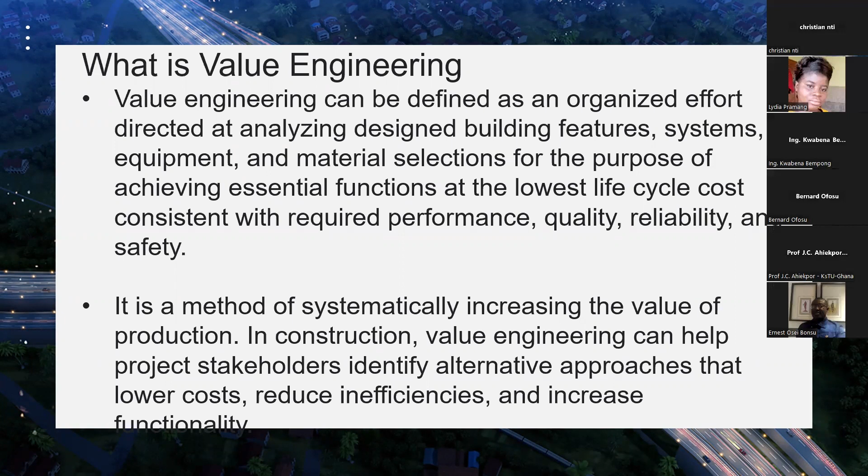So here we are talking about value, and I explained that the goal of value engineering is value improvement. It is not just about reduction in cost, as sometimes we want to believe. The value improvements might relate to scope definition, functional design, constructability, coordination, and all sorts of things. It also means you would want to minimize unnecessary costs, because there are certain costs which are uncalled for. You want to optimize processes, you want to increase profit. All those things are good, but that should not be the sole aim.

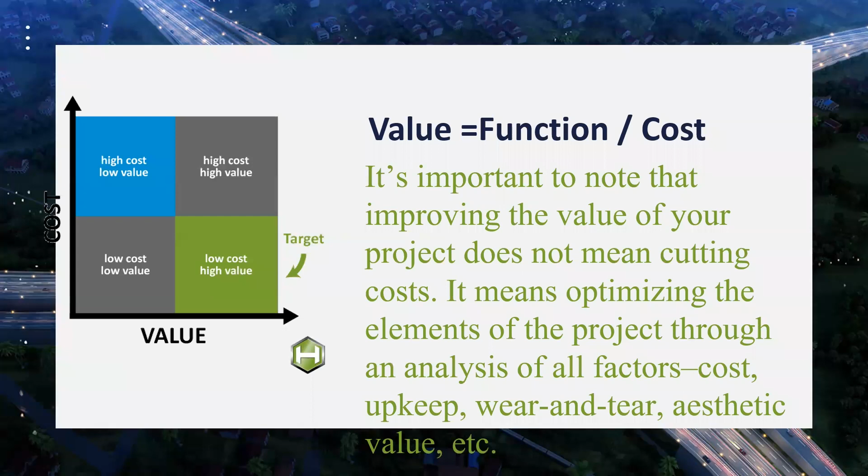At the end of the day, the value is important, and I defined value mathematically as being directly proportional to function and inversely proportional to cost. So value is equal to function over cost. As engineers, you would appreciate the fact that if the function increases and the cost remains the same, the value would increase. In the same vein, if the function stays the same and the cost reduces, the value would increase.

We looked at this particular graph and said you can have low cost low value, high cost high value, but our target is always low cost and high value. That is always our target. We want to reduce the cost, but keep it high in value. And the question one may ask is, what is the reference cost?

So you see, it is therefore an iterative process. You start with something and then you want to refine. You don't tell yourself that this is the solution, because as engineers we provide solutions. That is our main job, to provide solutions, not a solution. There are many solutions, but you need to take it through the iterative process of coming up with the best solution. And the best solution may not solve all the problems, but then it has value.

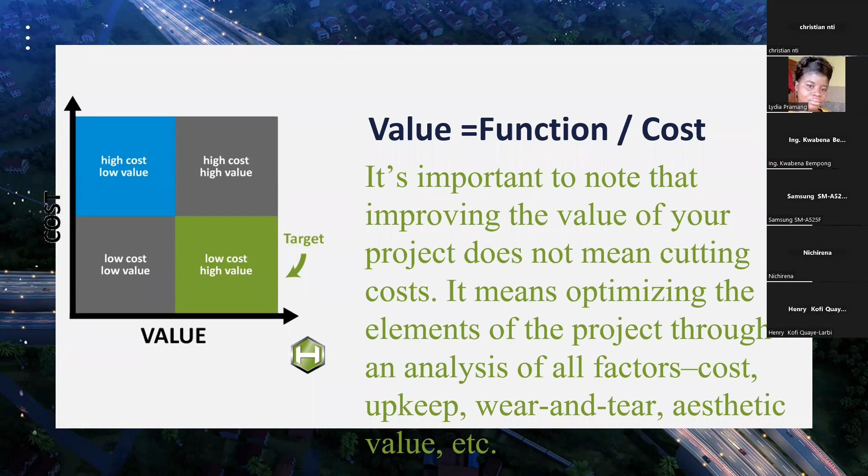And that is what we are talking about. So it is about optimizing the elements of the project through an analysis of all the factors. Cost, by all means, has to be there. The upkeep, maintenance, aesthetic, and everything is all part of it.

Then we went on to look at the approach, and I mentioned that there is no standard approach. All you need to do is discuss with team members, and you have to ask questions. Engineers, you have to be more like skeptics. Don't just see one solution and tell yourself that I have arrived. Ask questions. Ask yourself, what functions are being performed? What is the material specification? What quantity of material should be used? Are there alternatives that have to be used? Are there possibilities of elimination?

Just begin to question. And I used my own case, that a maxim I have is that because things have always remained the same, that is not enough reason we must not change. Change is always necessary, and we must be adaptable to change. Don't be set in your ways. Don't be set in your mind that there's no other way, even for something that you have done over and over again.

Somebody asked me about the difference between value engineering and value analysis, or something like that. And I did mention that the difference between the two is that one may be an established process.

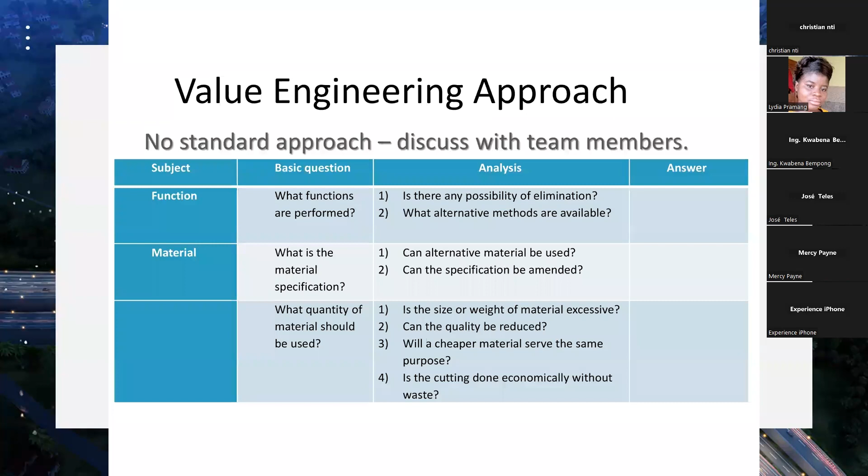One is an established process, but then you can also have a situation where you have a new product or a new design or a new construction that you're undertaking; that is where you do the value engineering approach. For value analysis, it's something that is existing and you want to find ways of improving or increasing the value. Then we went on to look at the methodology, and please let us take note of it.

We start with information gathering. You have to do a functional analysis. You brainstorm, and the whole idea of brainstorming is to come up with alternatives, which is something that we do when we are doing economic analysis. And then you evaluate these alternatives. Having done that, you then move on to that particular alternative and develop it further. And then you make a presentation to your client.

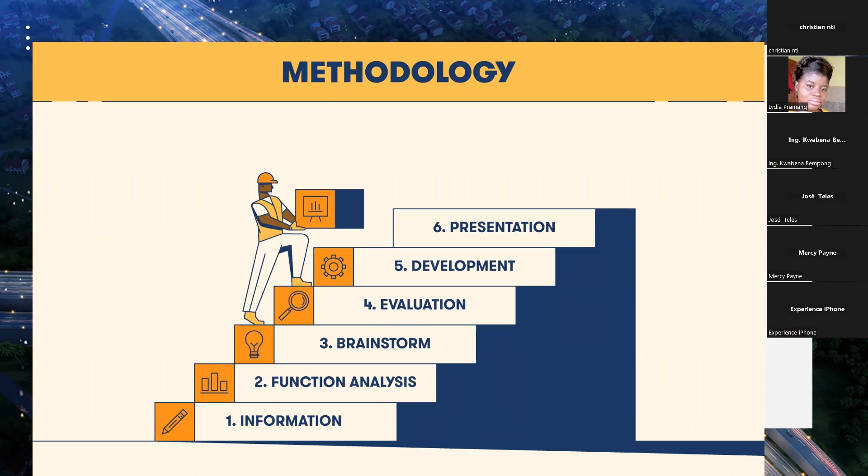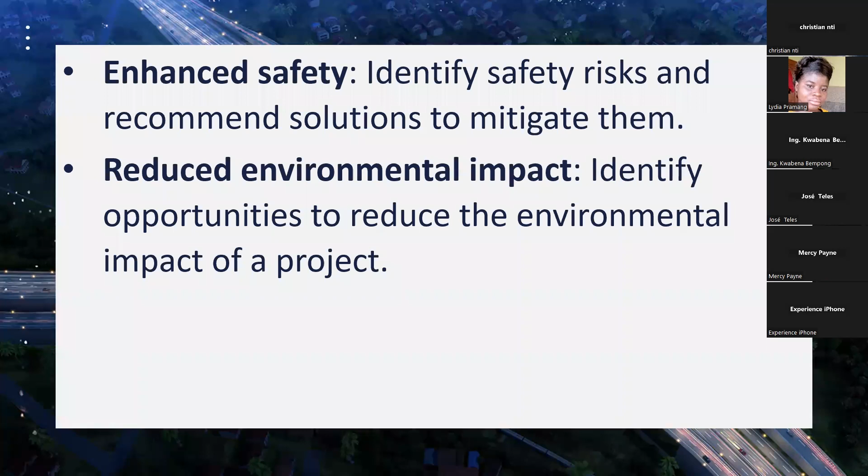So what are some of the benefits? Cost savings, improved efficiency, a better quality of the product that you are providing, enhanced safety and reduced environmental impact. We also looked at this particular graph, and the question that comes is: when do you undertake value engineering? Should it be at the planning stage? Should it be at the operation? And the answer was that it can be at any stage.

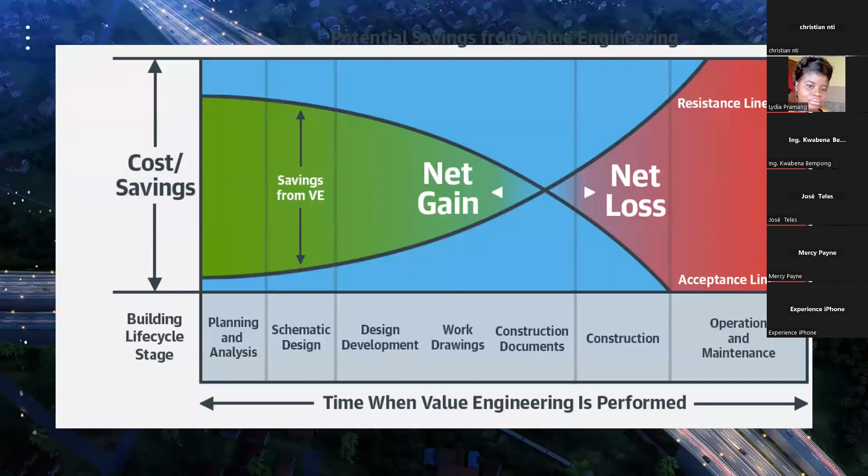Therefore, in the beginning, if you are able to have a good value engineering exercise, you stand a lot to gain, as opposed to waiting till the end. When you have bought everything and then you want to change the method of construction, that would create a problem. So having done that, we are now moving on to the case study of the Pokuase Interchange and local roads project.

Please permit me in the first few slides to talk about some background information. The Ministry of Roads and Highways was the implementing ministry, and the implementing agency was the Department of Urban Roads. This project was financed by the African Development Bank and the government of Ghana. Associated Consultants did the design and supervision; the design entirely on its own, and for the construction we partnered with Bigen Group of South Africa. The contractor was Zhongmei Engineering Group, and they did quite well.

Our scope of works: design review, supervision and contract administration, safeguards, compliance monitoring, documentation and reporting, and then the post-construction. Please permit me at this stage to introduce Associated Consultants to you. Associated Consultants is the leading infrastructure consulting firm in Ghana. We are a multidisciplinary firm and maintain world-class technical expertise. We are a wholly Ghanaian-owned firm, founded in 1968, and we maintain high standards for quality, health, and safety, committed to delivering projects on budget and on schedule to the complete satisfaction of our clients.

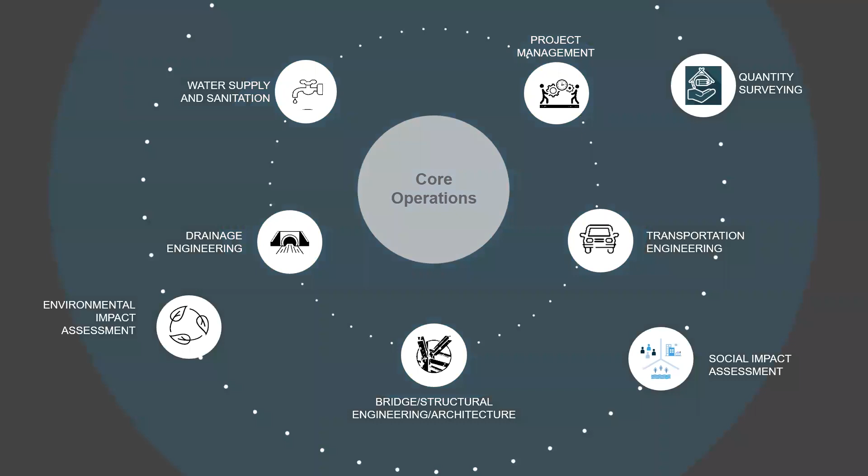I believe that at this stage, Associated Consultants is the only local consulting firm that is ISO 9001:2015 certified. Our core operations are in water supply, project management, quantity surveying, transportation engineering, social impact assessment, bridge and structural engineering, architecture, and environmental impact assessment. And as I mentioned, there's a very fine blend: the older ones, not too old, and the young ones, all blending. This is just a snapshot of those that we have.

So now let us move on to the design and construction of the Pokuase Interchange. To start, I always have this quote, just like what you would say: in the beginning, God created the heavens. The intersection was chaotic, with several accidents coupled with high pedestrian and vehicular traffic. Who fought for space? The pedestrians on many occasions lost the fight. So the government of Ghana looked at this and was unhappy, and therefore approached AfDB for funding of an interchange and approach roads.

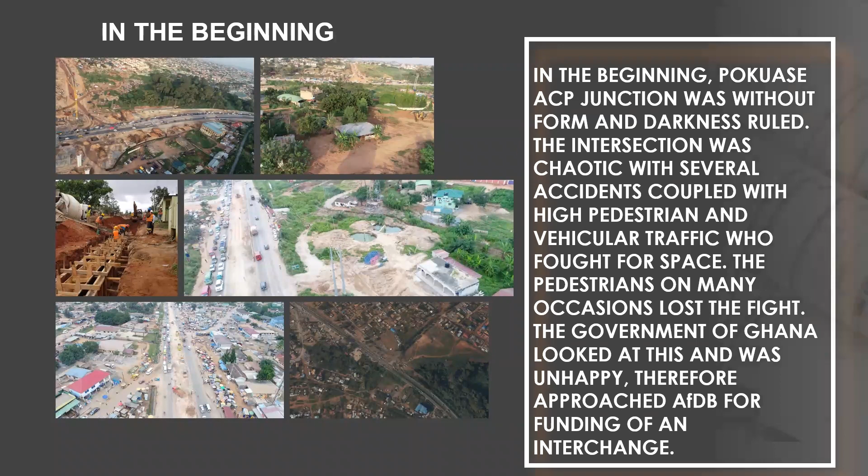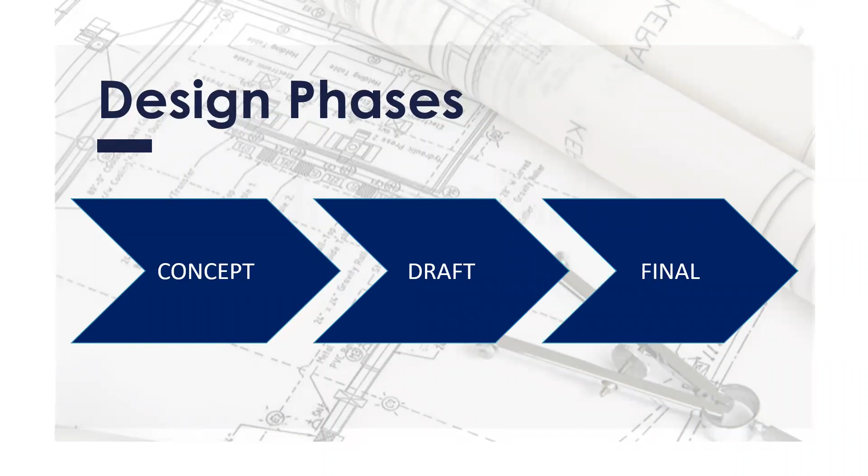So let us first look at design. And at this stage, you see where we applied the value engineering process. Our design phases: conceptual, draft, and the final. But before then, we do not just say that we are going to put up a 3-tier or a 4-tier interchange. It has to be data-driven. It has to be driven by traffic modeling and information. We have to check other factors.

So we came out with 7 alternatives, and this is where the value engineering is. 7 alternatives were considered, and each option was then subjected to factors. Remember what I mentioned, that you then go through the process of looking at the various options and alternatives, and then subjecting them to a rigorous analysis. This is what it is all about. We've done the functional analysis. We have now come to the point where we are looking at the alternatives.

And in our case, the factors that we used were: what is going to be the land take in terms of overall property impact? Are we going to impact so much property that we cannot even pay for? What is the capacity that we are going to derive? When I talk about capacity, we mean the traffic capacity. And then the cost. Is it going to be so expensive that we cannot build? And as I mentioned, value engineering always must have a cost element in it.

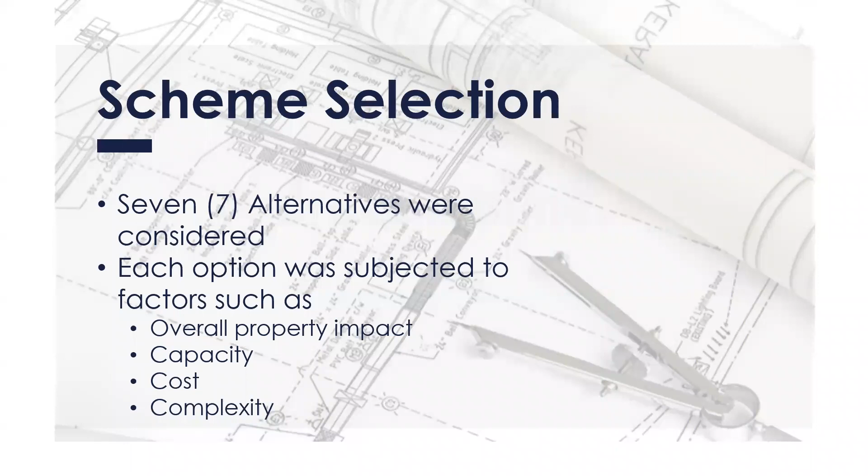Then complexity. Is it going to be so complex that nobody else can build, apart from maybe people from the US or from the UK? No. Our plan was to ensure that it wasn't too complex and it can easily be built by Ghanaians or any international contractor. So the schemes that we explored, the first one was an at-grade signalized intersection.

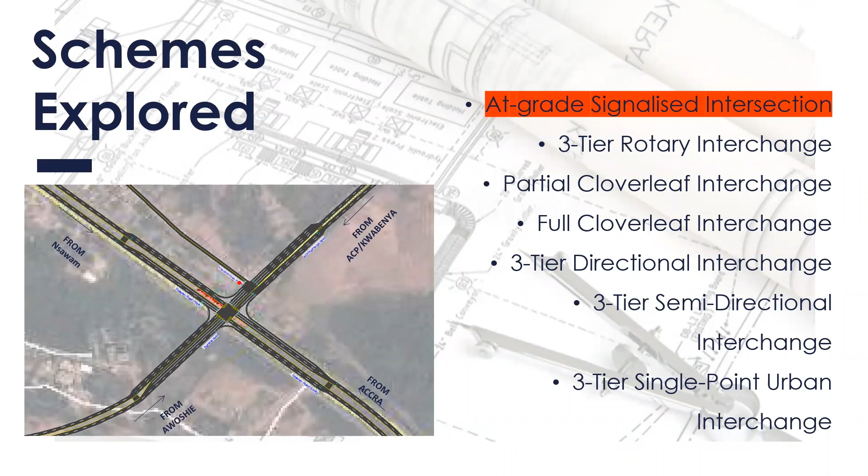And I'm not going to go too much into the detail. So we said, okay, why don't we just have a signalized intersection? So from Awoshie to Kwabenya, and then from Nsawam to Accra, let us just have an intersection there, traffic upgrade. So we looked at that. Then the next one was to look at a 3-tier rotary interchange, like the one you have at Akwaje. Let us explore that. So that is what we had.

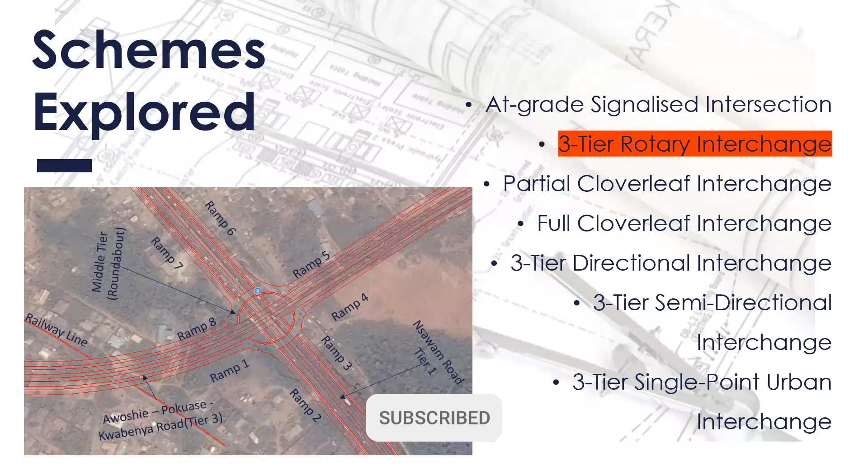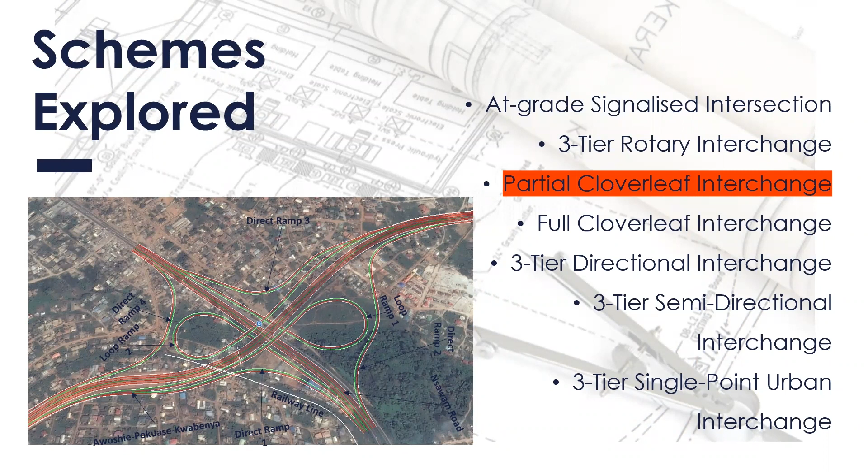Okay, what about going to a partial cloverleaf interchange? Partial, not the full cloverleaf. So a partial cloverleaf like what you have at Apenta. Then the next one was, okay, full cloverleaf. At Tetteh Quarshie, we have a full cloverleaf there. Then let us go into more like a system interchange. So we are looking at a 3-tier directional interchange. Directional, we don't stop.

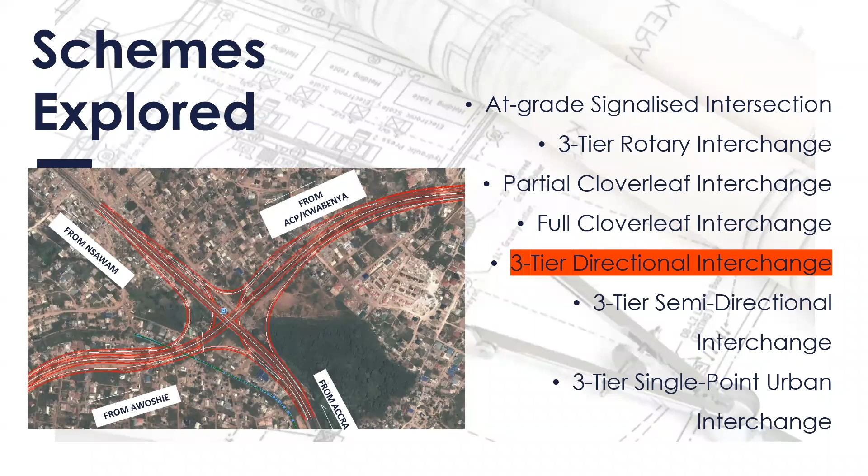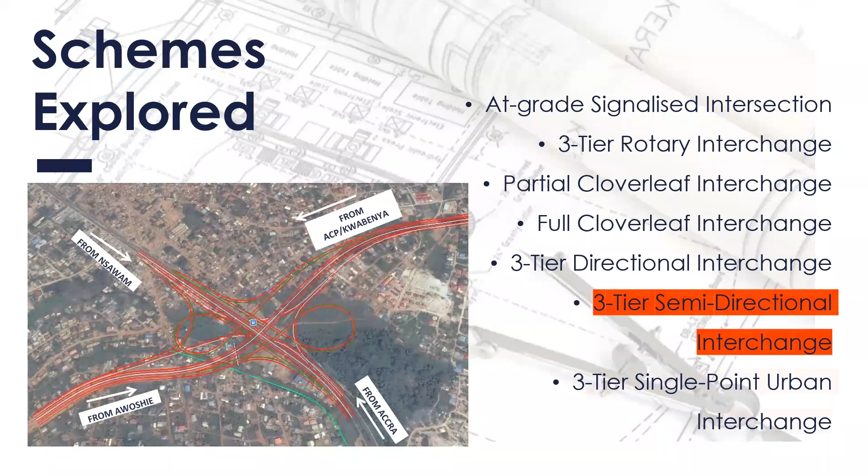Then what about a semi-directional interchange? And these were all, you can see that we have drawings. We just didn't think of them in our mind. We have to draw or sketch them to validate our concepts. So these are all parts of the value engineering process. Then we went into a 3-tier single point urban interchange, what we normally refer to as SPUI.

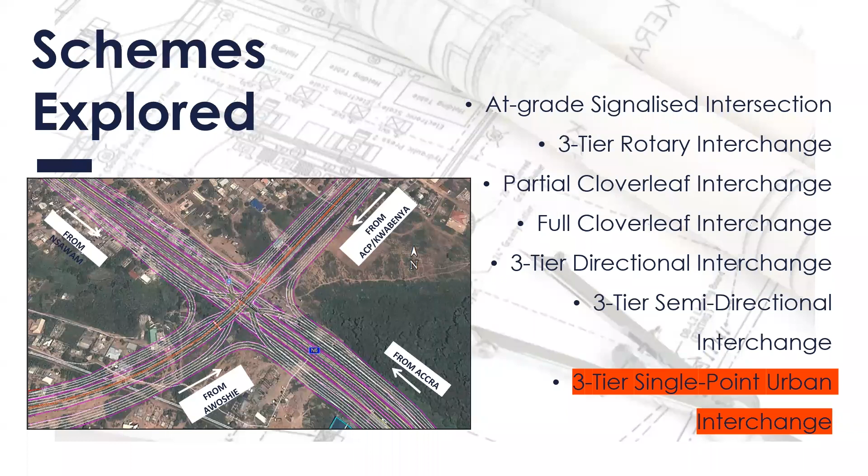So having done the evaluation, now I'm going to the next stage. You remember the approach, you have to do the evaluation. Having done the evaluation, we came up with a selected scheme. At the end, even after you have selected a scheme, you still have to drill down and ask yourself, what are the positives and what are the negatives? What could happen? What could go wrong?

And remember, I did mention that there's something we call fatal flaw analysis. Because in fatal flaw analysis, what you are doing is that you want to identify, discuss, and mitigate the risk for your projects. Every project has risk, but you need to know them. If you don't know them, how would you mitigate? There are issues of technology risk. You can design something nobody else can build, because it becomes building a castle in the air.

So you have to ask yourself, can this be built? And remember, I talked about constructability. Engineers don't design something that nobody else can build. We can only build it in the computer model. But then on the ground, it's a different story. So if you cannot build it, please think about it.

In other jurisdictions, what they do is that the designs are even given to contractors. And then the contractors, we ask them, can you build this? How are you going to do this? So the contractor will come up with a methodology for the construction. Sometimes you don't even have the materials in country to import. How much is it going to cost? These are things that one has to look at.

Then the risk of what you are providing. You are providing something that may be risky. And many other environmental issues. You know, in our case, we had the Gua Co. Co in Ga means forest. So Gua Forest was very, very close by. And if we're going to impact on it, what will be the level of impact? There were a lot of properties there. How were we going to impact on the properties? We had to pay for them. So all these things were looked at.

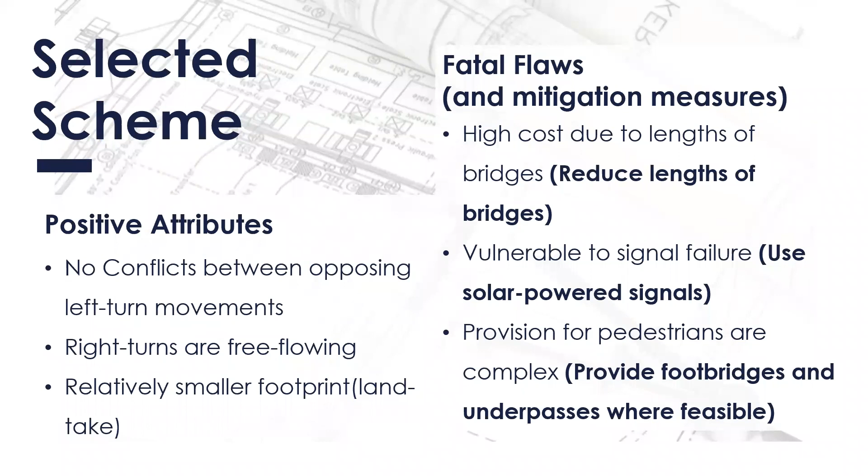Right turns are free flowing and a relatively smaller footprint. Just consider or compare. Look at what I gave you. For instance, the full cloverleaf option. The full cloverleaf may be good, but then the land take is huge. So you can compare what we have there and then what we have at Tetteh Quarshie, you know.

Then the fatal flaw. So we ask ourselves, as I had explained to you, we have to identify and discuss and mitigate the risk for our project. So we realized that you could have high costs due to the length of the bridges, because the cost center of interchanges is the bridges. The bridges cost. So the major cost centers are to do with the bridges.

So what then do we say? Okay, let us reduce the length of the bridges so that we'll have a lot more embankments, so that you reduce the cost. Also, earth is not too expensive in Ghana, so we have to look at that. Maybe in other jurisdictions where they do not have the material, that may not have been their solution to the high cost. They may have looked at other options.

Then we said it is vulnerable to signal failure, because in the middle tier, we were going to have only left turns, just what we call a two-phase signal. Stop, go, not those complex four-phase or three-phase signals. So this was going to be a two-phase signal. Then we said it is vulnerable. What about if the power goes off? So we said, okay, then we'll use a solar-powered signal.

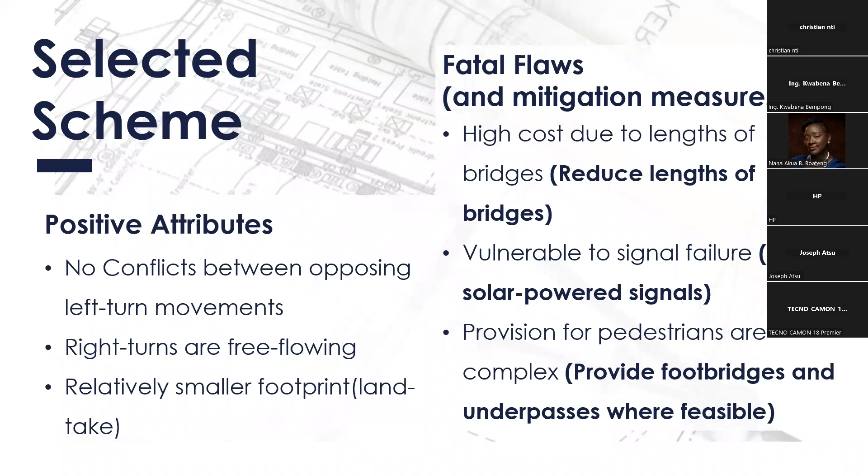Then we had tier 2, which was a signalized intersection for the interchanges, so that if you were coming from Awoshie going to Kumasi, or from Accra going to Awoshie, or from Kwabenya going to Accra, or that kind of arrangement, that is where you were going to turn. And then we also had the free flow right turn, which was not subject to any traffic. And then tier 3 was the Awoshie Kwabenya Road, that is at the very top level.

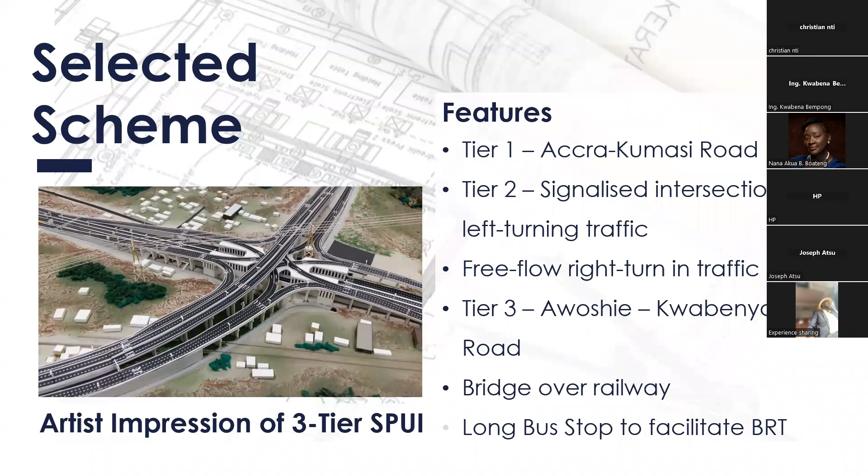And then we also had a bridge over the railway, which is to the western end of the interchange, and a very long bus stop to facilitate the operations of the bus rapid transit, which was piloted some years ago. So these were basically the features of the 3-tier single point urban interchange that we designed and went to town with. And very soon you'll get to know how value engineering led to the 4-tier interchange.

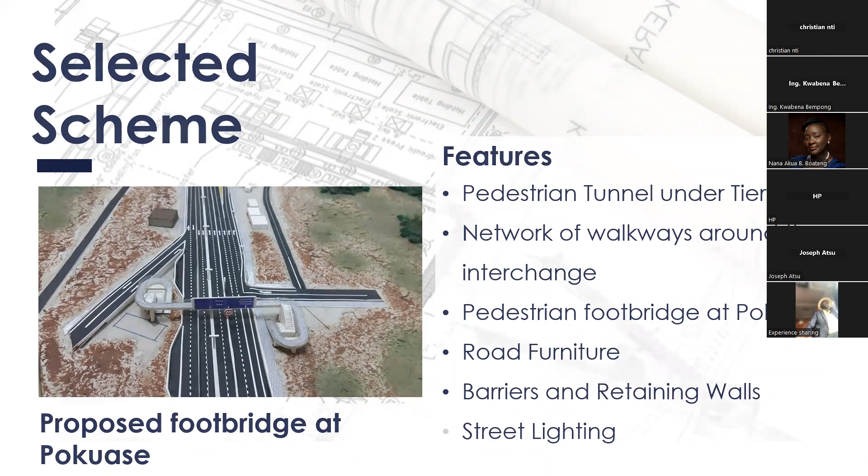And this is even at the design stage. So as you went on to the next level, you see that you can have value engineering at any stage. Even after doing all this, we had to do another one, and I will explain why we did that. As I mentioned, we had footbridges and underpasses, but I'm not going to go too much in that. So now I'm looking at the selected scheme, and again, I'm going too much probably, but just for the benefits, because we have various types of engineers here.

Because even when it came to the bridges, the type of bridges to choose, is it going to be post-tensioned? Is it going to be precast post-tensioned, or pre-tensioned precast, cast in situ? All sorts of combinations. Is it going to be steel? What are you going to do? So these are all part of the processes; you have to undertake a value engineering process, even for the choice of the technology or the choice of material.

So we came up with post-tensioned, pre-stressed concrete, triple cell box girder, and I'll be showing that to you very soon. We had reinforced concrete box girders provided for spans up to 21 meters. So it's not everything that was post-tensioned; where we had shorter spans up to 21 meters, we just did the normal RC, that is reinforced concrete box girder, without any post-tensioning.

Then there are others too, where we had box girders, that's the post-tensioned pre-stressed concrete, for spans up to 48 meters, between 38 and 48 meters. And then there are areas where we have separate box girders and all that. So these were things that were chosen, and all at the time of design, because for bridge design, you should know how you are going to construct it, even before you do the design, because the manner of construction has an impact on your design procedure or design process.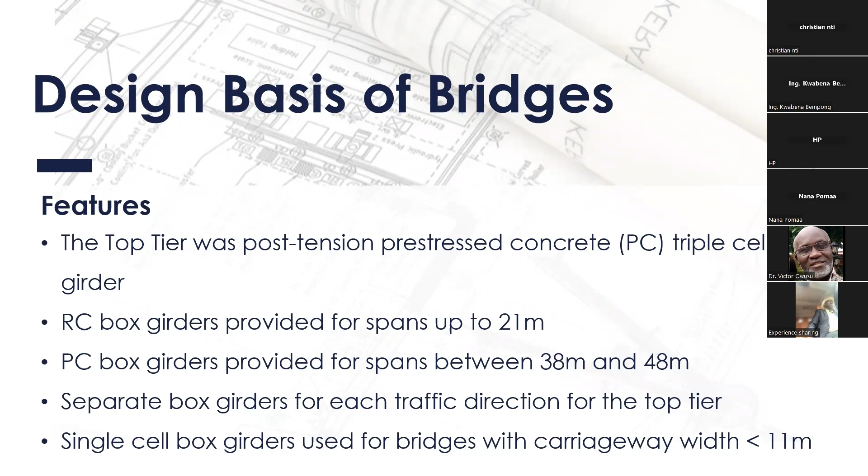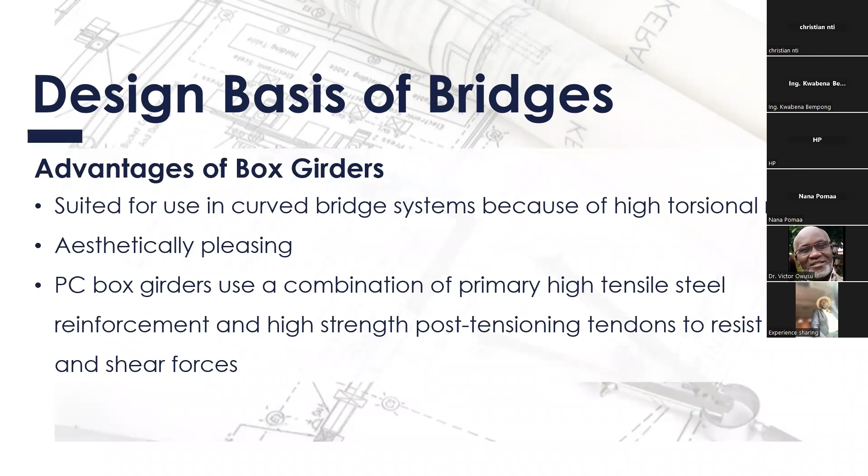Very important. I'm not a bridge engineer, but this is something that I have learned having been on the project for all this while. So again, what are the advantages? Like we always do, you must have advantages and disadvantages. Whatever you do, don't just do it by rote. There must be a reason for doing it. And this is what we came up with.

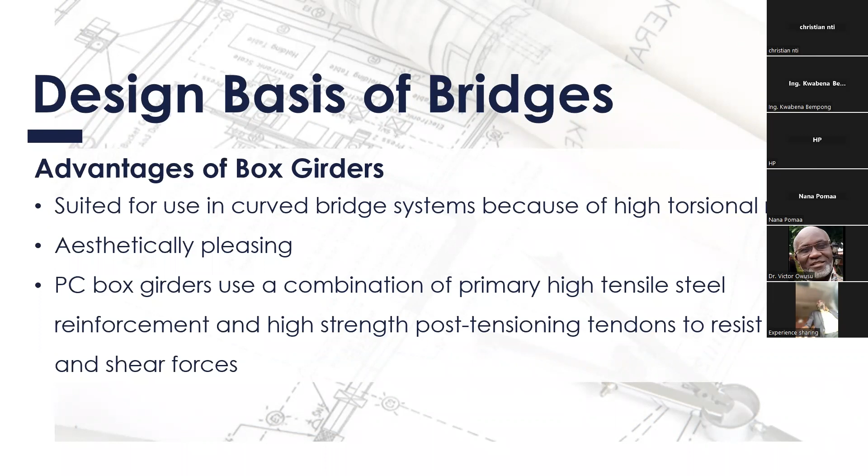We said that it was suited for use in curved bridge systems because of the high torsional rigidity. It is aesthetically pleasing, and they use a combination of primary high tensile steel and reinforcement. And this is something that we already know. And some of the bridge sections. So this is just showing the plan of the various bridges. We have the top tier, the ramps, and then the middle tier, and then retaining walls.

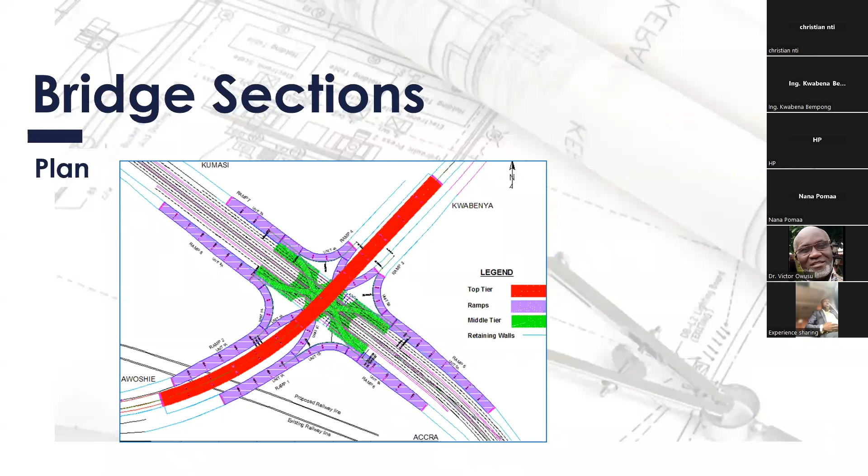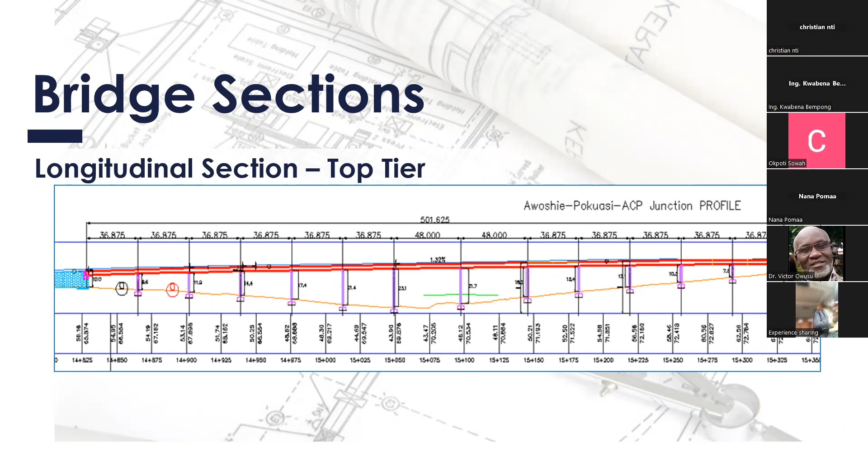So in terms of the sections, we have the longitudinal section, just showing you the spans. So you can see ranging from 38 through 48 all the way. And again, these were all at the design stage. We'll see that once we got into the construction stage, we had to make some changes using value engineering, and that was a value engineering from the contractors. And so the railway bridge, as I mentioned, and the spans are also very clearly shown here. So for instance, this is a single box post-tensioned cross-section.

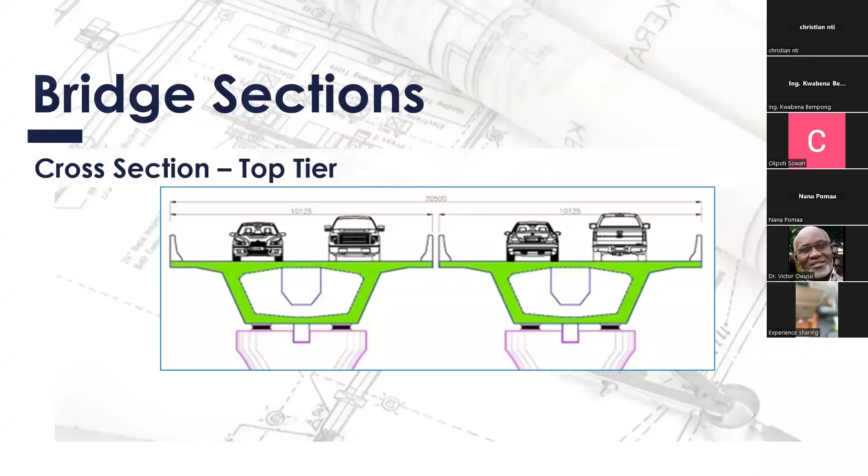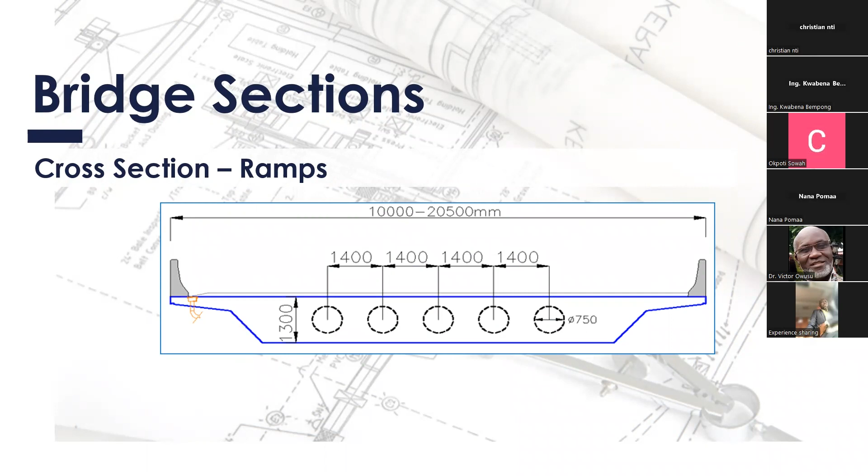Then we also did another interesting thing. For the ramps, we used a voided slab. I think that there's one voided slab on the N1. That is the one that was done by GHA some time ago. Yes, that's another cross-section showing here.

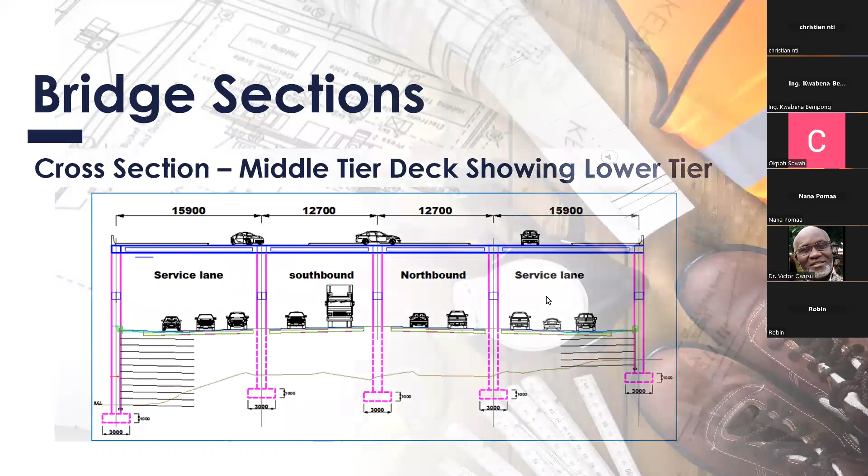So now let us move into construction. So now we have gone to town, we've gotten a contractor, the contractor is on site, we have to undertake a design review. And it is always good for those of you who are contractors that you subject these designs to your own checks and value engineering.

It helps because at the end of the day, when you are able to come out with a good proposal, you earn half of the savings. Yes, half of the savings will be for the contractor. So there's good reason why you must undertake value engineering. So there's some money to be gained.

So in 2018, the contractor came to site. These are just the contractual details which I've already shared with you. The project was awarded in March 2018. So the construction works. So basically what we're doing is that we're going to construct an interchange at Pokuase. We're doing 7 kilometers of storm drains, and this is something that a lot of people do not know.

So after the confirmatory tests were done, the recommendation was that instead of providing a few piles at the pier locations as had been envisaged at the time of design, there was a need for us to provide piles for all. So this is just some of the samples from the drilling that we did.

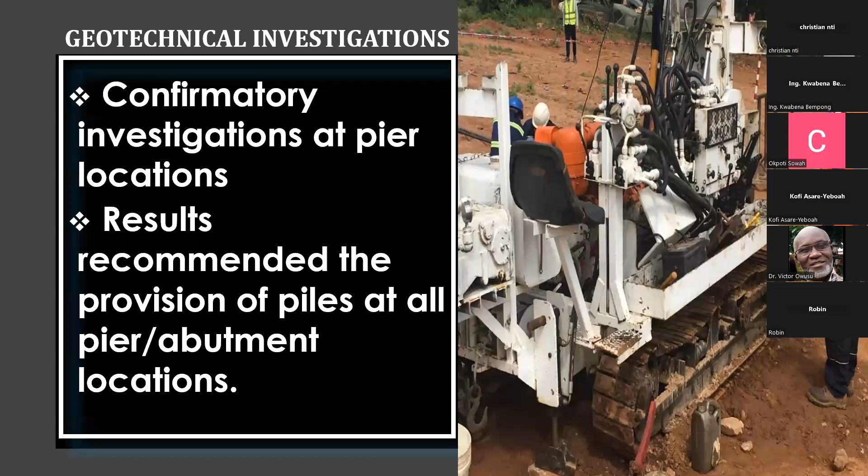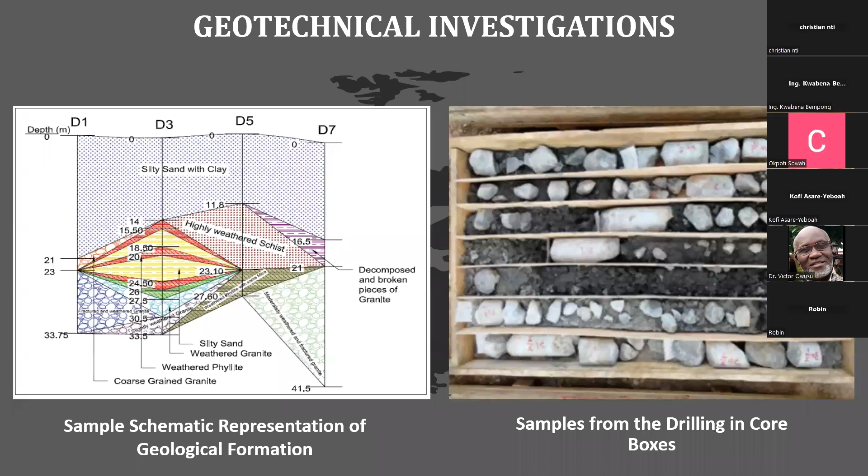It was quite an interesting site to behold, with fault lines interspersed all over the place. So we had to take a decision, and where the rock was competent, we were going to provide what we call short RC piles. By short piles, I mean in some places we were getting 6 meters. We could have excavated, but that would have been a very huge excavation just to put in your foundation.

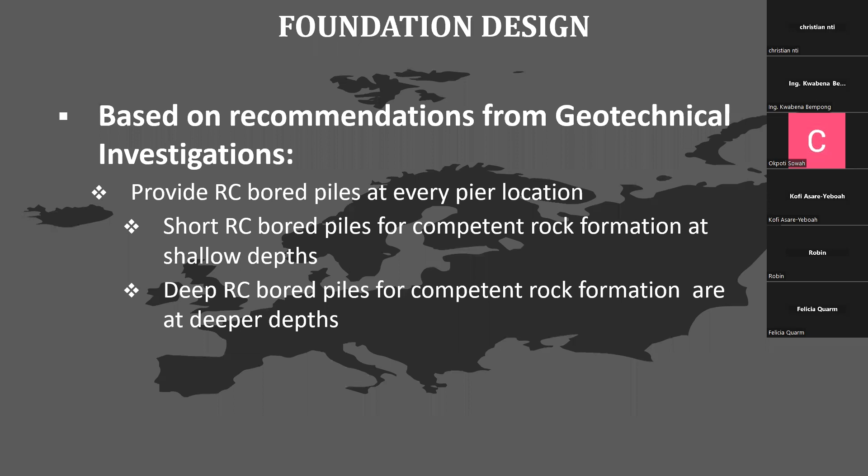So we did this, with the total length of reinforcement to be 12 meters. Then for the deep foundations, the design was going to depend on the skin friction. The end bearing was not taken in the design, and there we were talking about 28-meter piles.

So as I mentioned, and I keep mentioning, value engineering came on board. Last week, I explained that in clause 13.2 of the conditions of contract, whether red, pink, yellow, or silver, all of them come up with the same thing. So the contractor came to us and said, look...

Looking at the methodology for construction and the cost for the bridge construction, we're talking about the 3-tier design, the time constraints, and the traffic management requirements. Remember, if you wanted to construct such bridges, you need to support them, and to support would mean that the Accra Kumasi Road was going to be closed. So they looked at all of this.

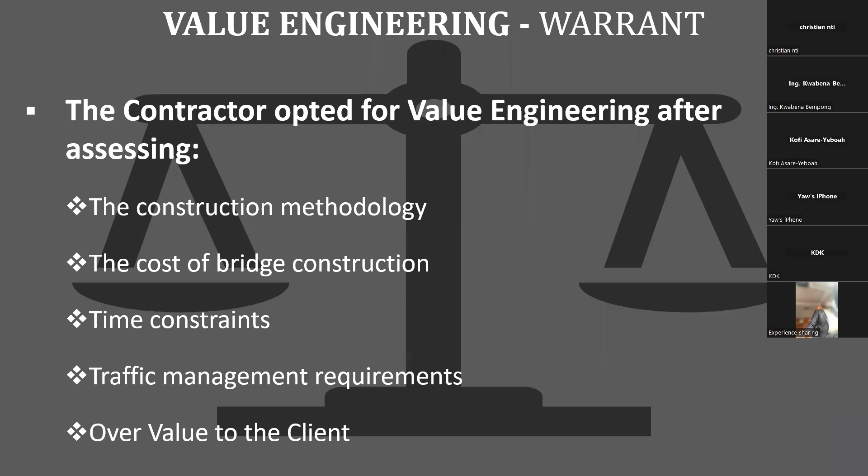They said, look, we can provide value to the client, extra value to the client. And that extra value meant we were going to go under clause 13.2 of the conditions of contract, which deals with value engineering, and it permits the contractor to propose a change which will benefit the employer.

The design shall not - and this uses 'shall', so it's mandatory - lead to an increase in cost above the original value. It shall not cause a delay in the performance of the contract, and shall be technically superior or equal to the original design, and shall be beneficial to the employer.

In our case, our original design had a certain cost, but in view of the foundation conditions we met, it meant we were going to have a very high increase in cost. We had done the calculations and knew how much it was going to cost, so that was going to be our benchmark for value engineering.

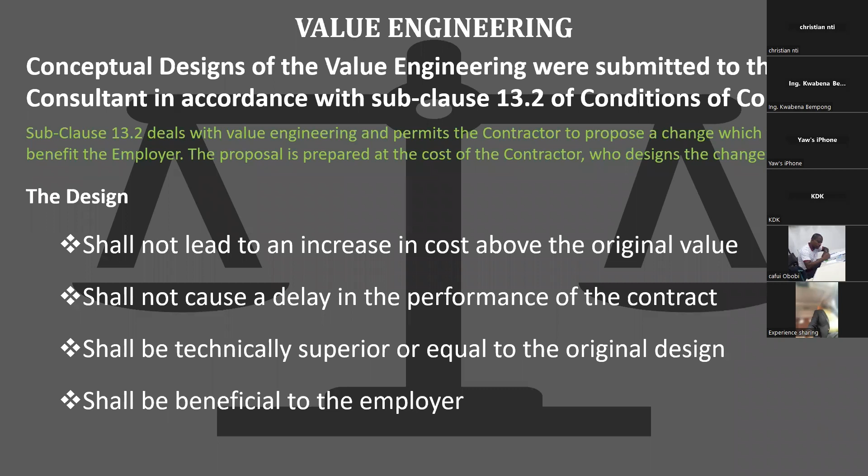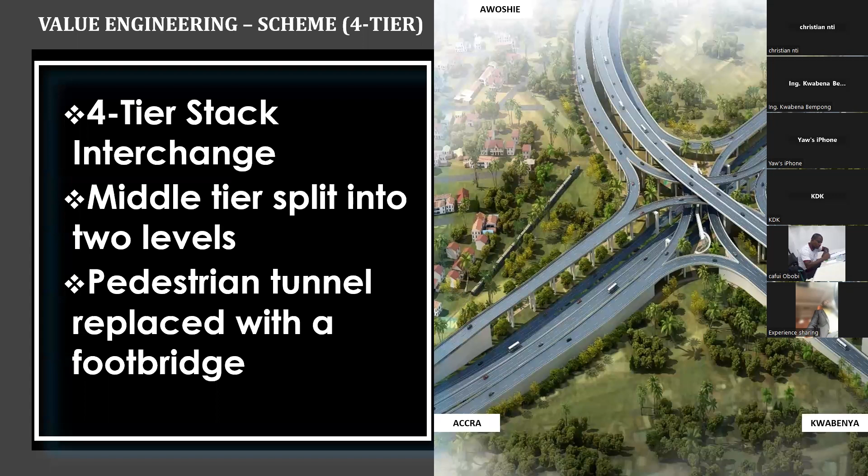So then the contractor came up with this idea of a 4-tier stack interchange, where the middle tier, which we had, was basically similar to what we had, but then it was going to split, and at the end of the day, this is what we came up with.

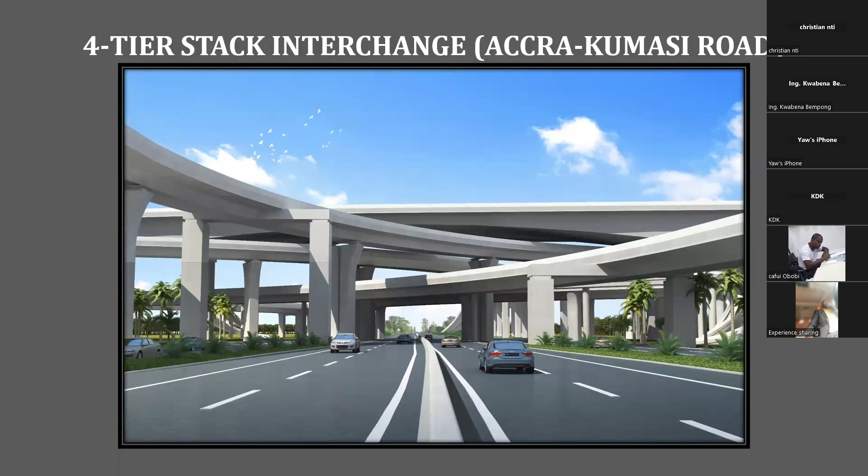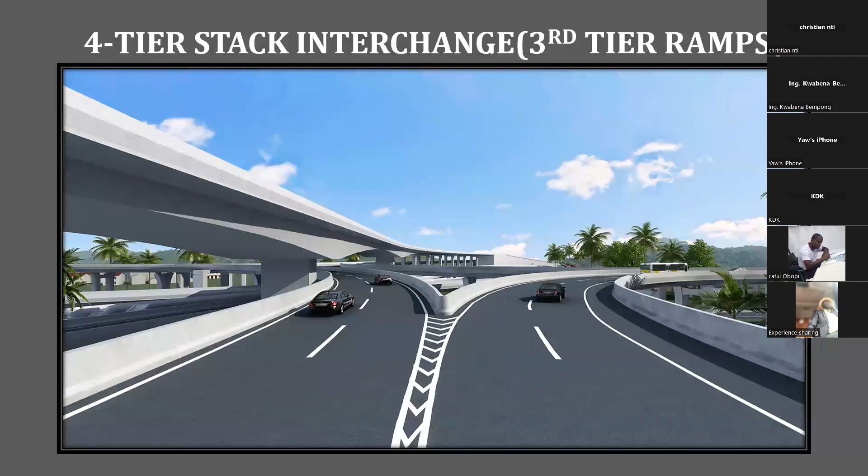From this point, I'm just going to show you a few pictures of the completed work, and also show you something about the construction. This is not the actual thing - this is the computer-generated modeling that was done, showing all the nice things we tried to do there.

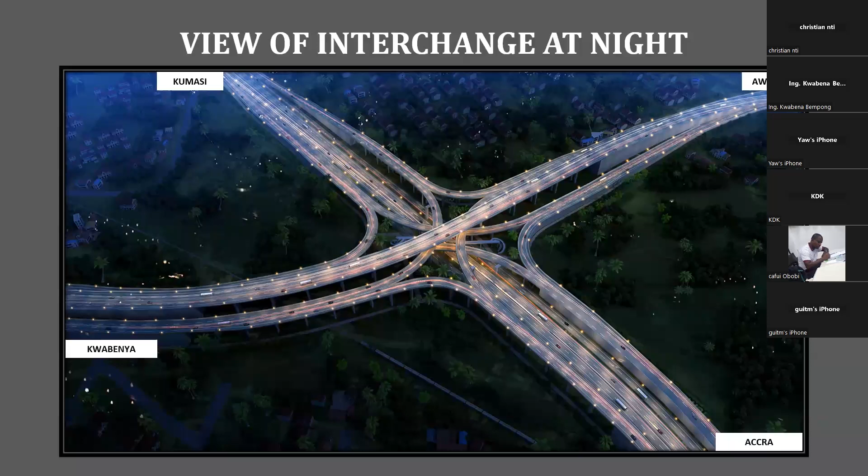And you can see at night what we sought to do. So this is the Pokuase Interchange, the 4-tier stack interchange. And to show you the new bridge, that is the 4-tier interchange - remember the first 3-tier, I showed you what we had done.

You can see that for the middle tier, we employed what we call the balanced cantilever approach. This was the bridge that went over the Accra Kumasi Road. We wanted to construct without putting in props all the way to the road, which would have blocked the road temporarily, and that was an additional value to the construction process.

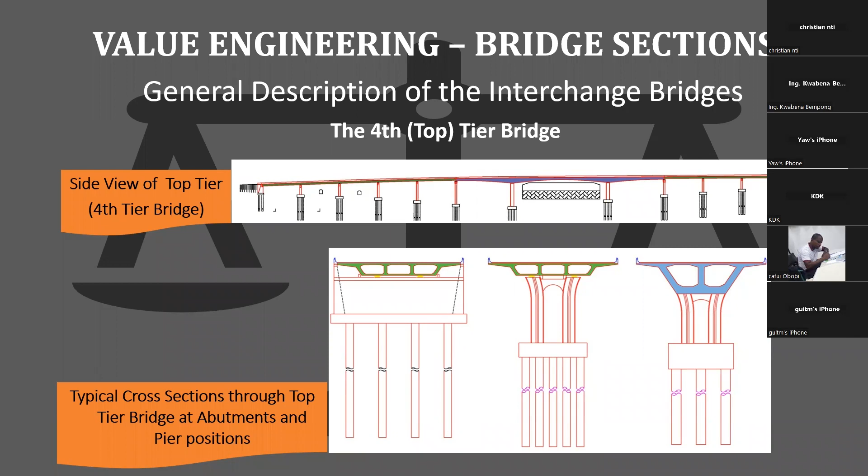Having this particular type of construction in Ghana - then the box girders, similar to what we had designed previously, but you can see that these are all on piles.

Then we also had another innovation, the retaining walls. Instead of using concrete or reinforced concrete cantilever retaining walls, we went in for reinforced soil walls, using geogrid. So the concrete facing that you see is not contributing to the structural stability of the wall - it is basically a facing. So this is what we did.

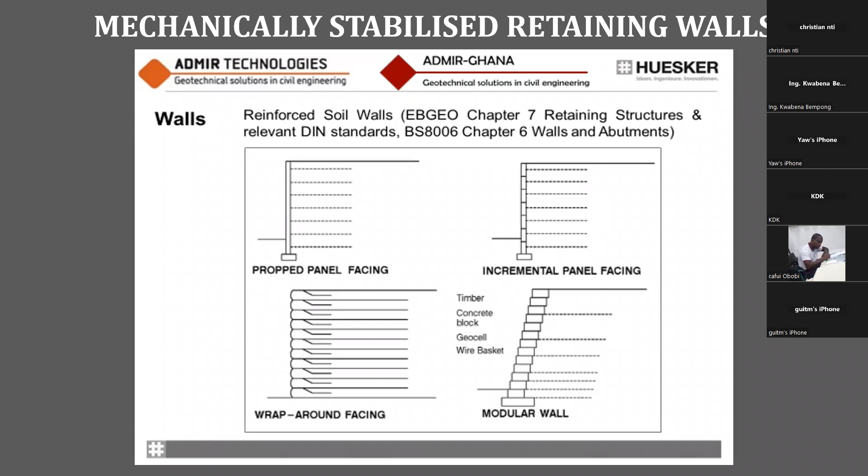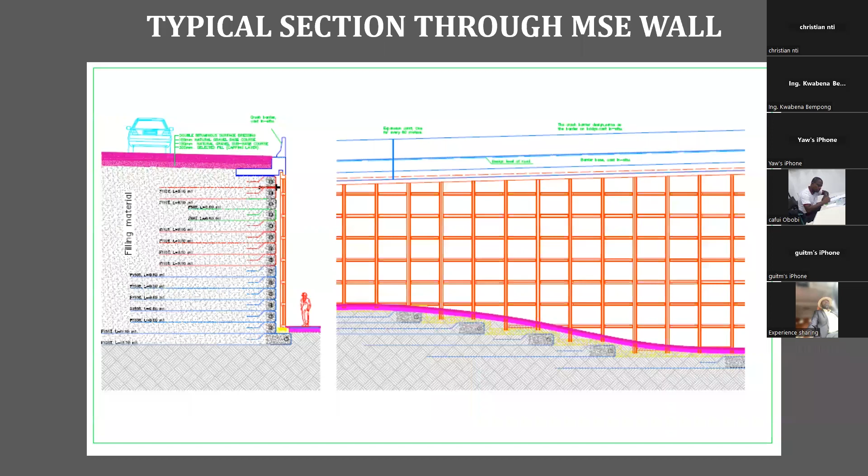The walls you see are not cantilever retaining walls as you would normally have. With this one, we were able to construct as high as about 12 meters, I think our highest was about 12 meters. Remember we talked about instead of having very long lengths of bridges, we would have this kind of retaining wall and embankment. So this is what we did. I'll just show you some of the construction pictures to show you the progress of construction.

Starting with the pile drilling. After pile drilling, we install the reinforcement cage, and having installed the reinforcement cage, you use your tremie to deliver the concrete to the bottom of the drilled pile. And having finished, you strip off the pile heads.

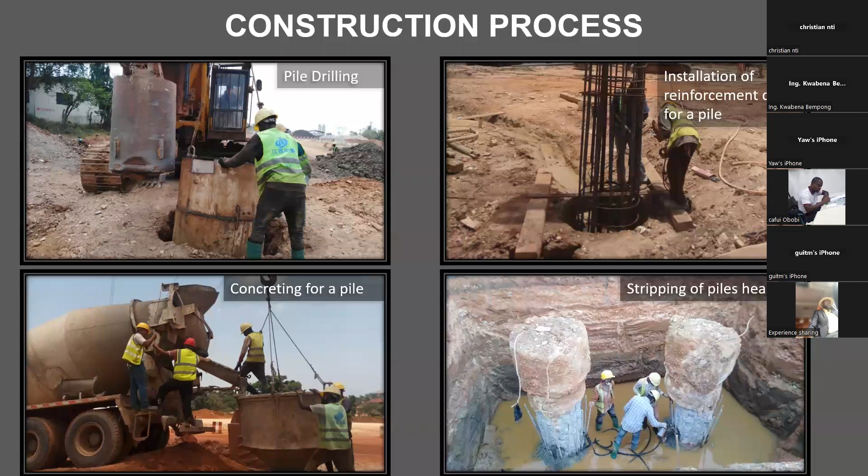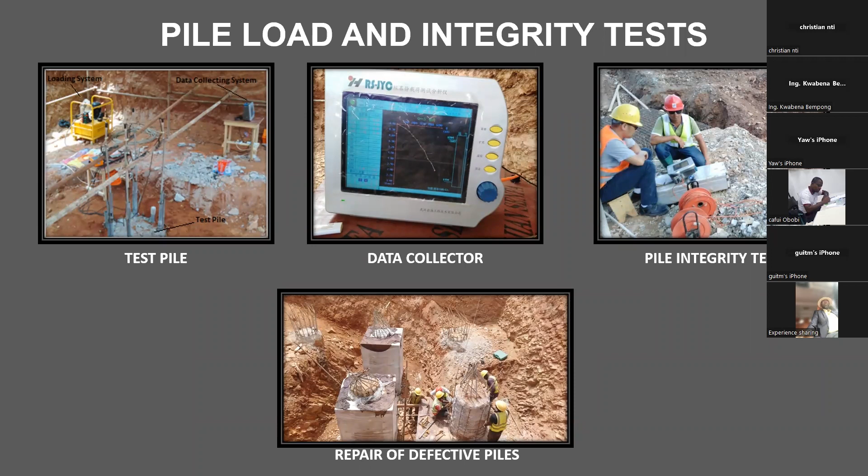After stripping off the pile heads, you undertake the integrity test, what we call the pile integrity test, to ensure there are no honeycombs or deleterious materials within the pile body. In situations where we had that, we had to repair them, and the bottom picture shows some of the repair works we did.

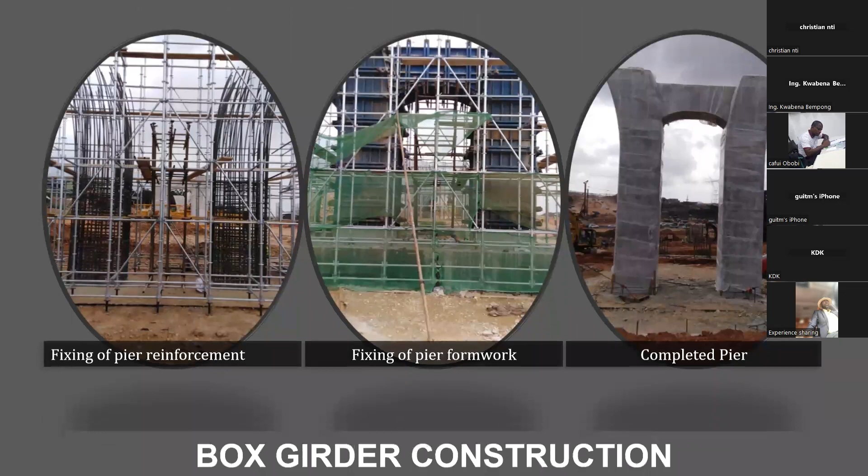Then the pile cap is completed, your piles are done, and the starter bars for your piers are also done. Then you are ready to move on for the construction of your piers. So the process: fix reinforcement, the formwork, and then the completed pier, ready to receive our deck, that's a roof deck.

We also use pot bearings. With pot bearings, you can't have concrete on concrete. So we have some pot bearings, and these are all designed in terms of rotation, whether it is for rotation, whether it is for translation, or for rotation and all those things. So this is all that was done.

Then we had earthquake restraints, because we know we are in an earthquake-prone area, and Southern Ghana is in an earthquake zone. We provided earthquake restraints so that when there's an earthquake, you don't have the deck moving independently of the pier, which would restrain the deck from falling. If you look at the Kobe earthquake in Japan, that's what happened, and we have learned from that.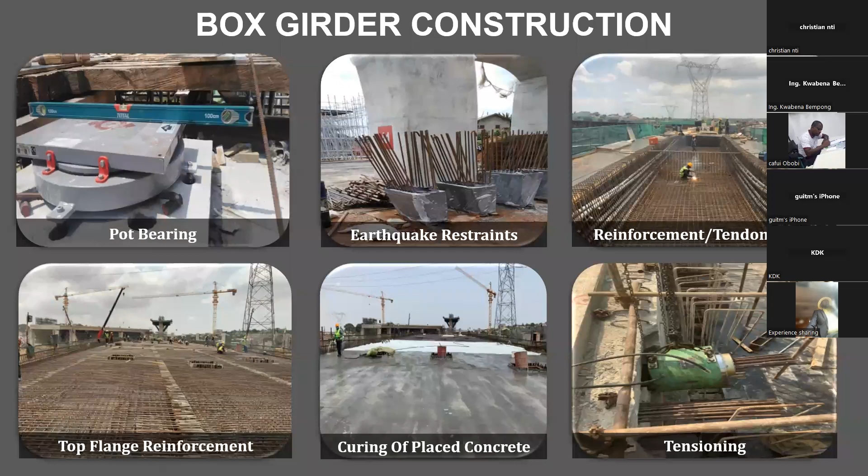You pull, you have a dead end which is anchored, and the other end is free. You just pull it, it compresses the concrete, and that is what they call post-tensioning. So we tension, cut it off, put in the grouts, and we are ready to go. That is the thing, and then that is our completed structure.

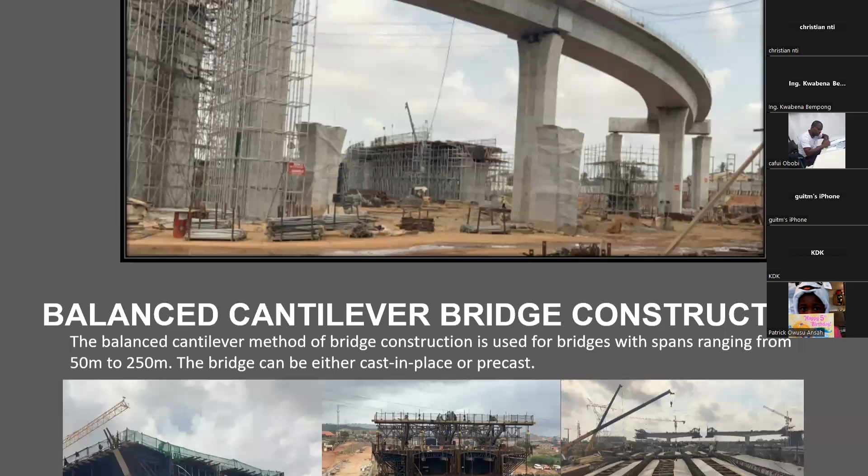This is one of the ramps, I believe this is the second tier. And then I talked about the balanced cantilever construction, because this is what we use for bridge spans ranging from 50 to 250 meters without any support. During the construction, there's no vertical support or prop.

You do it in sections. In our case, we have segments of about 3 meters, so you construct 3 meters. The reason it is balanced is that you balance the weight - you do right and you do left at the same time, so that there's a balance. And then you post-tension, then you move on to the next level.

You continue doing this until the two sections meet. On the bottom right, you can see the completed section. For the last section, I remember it was pomp and pageantry at midnight - the Minister for Roads and Highways was there when we did the last bit, connecting from the right to the left. You can see the ingenuity in engineering.

We were working independently, but because we were controlling the lines and levels, we were able to meet at the same point without any deviation.

Because if you don't do it well, you can have even a one meter deviation on one end, so the two will not meet in the middle.

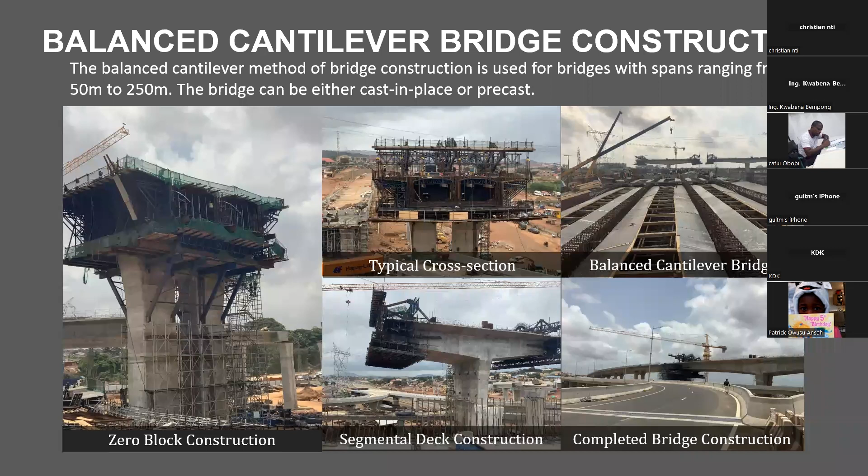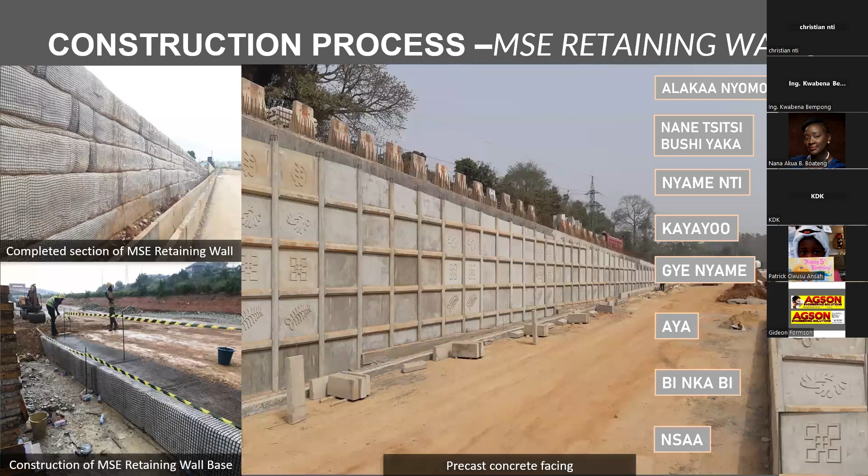I would want to credit architect Ralph Sutherland, whom I contacted to help me in the arrangement of these signs. Now, another thing that we did was the modular block retaining wall.

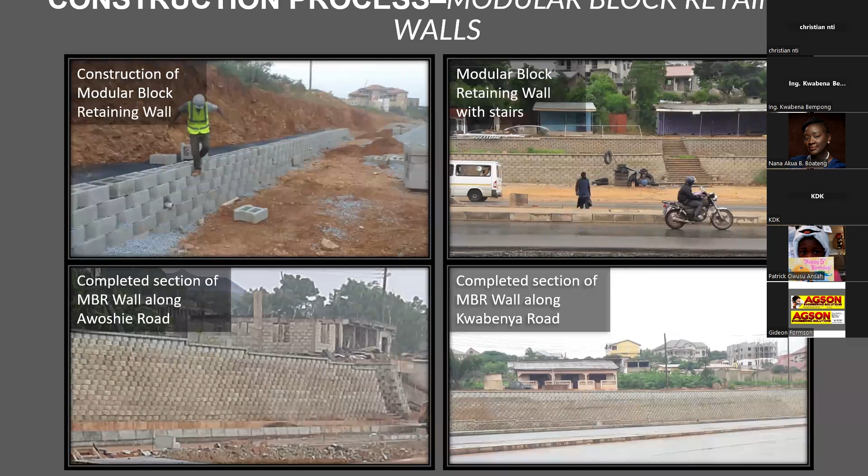Here we are using precast blocks for retaining walls. When you go to the Pokuase area, you can see this. This is also a type of mechanically stabilized earth retaining wall because it has geogrid to help reinforce the earth behind the walls.

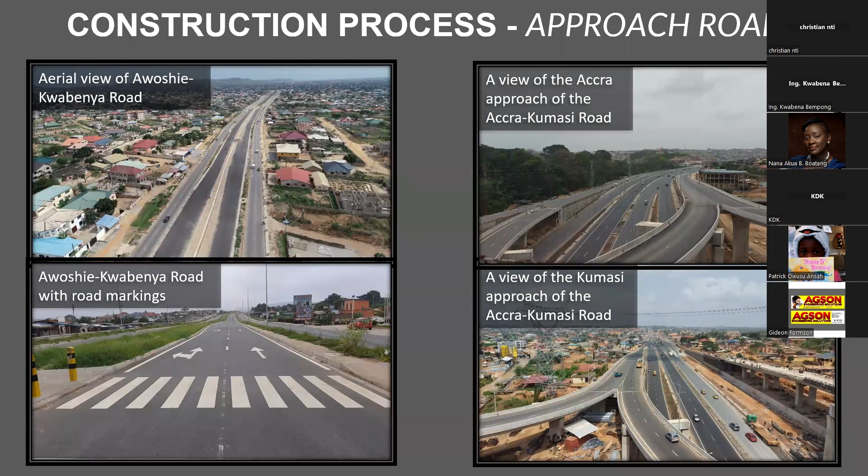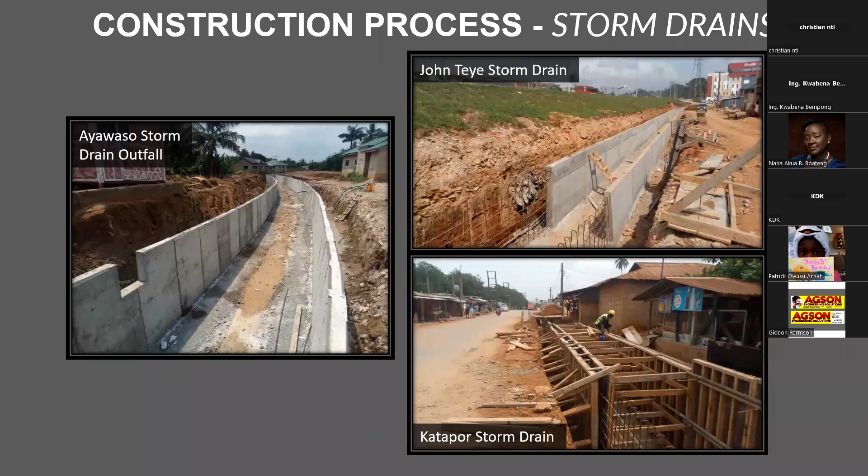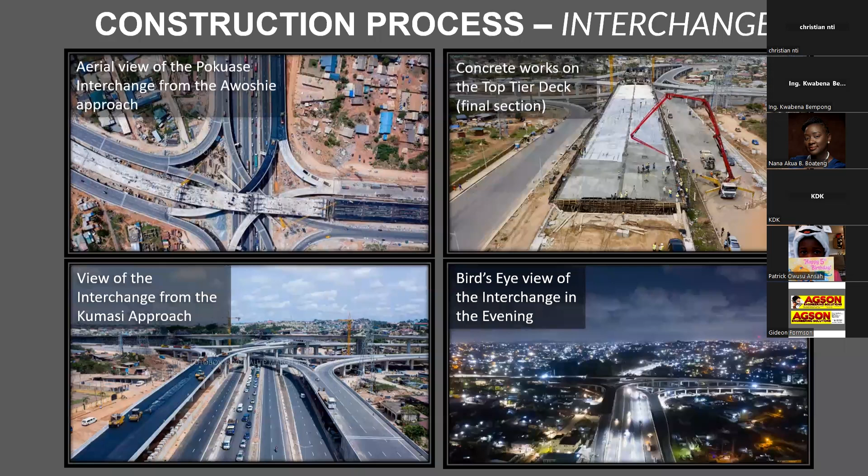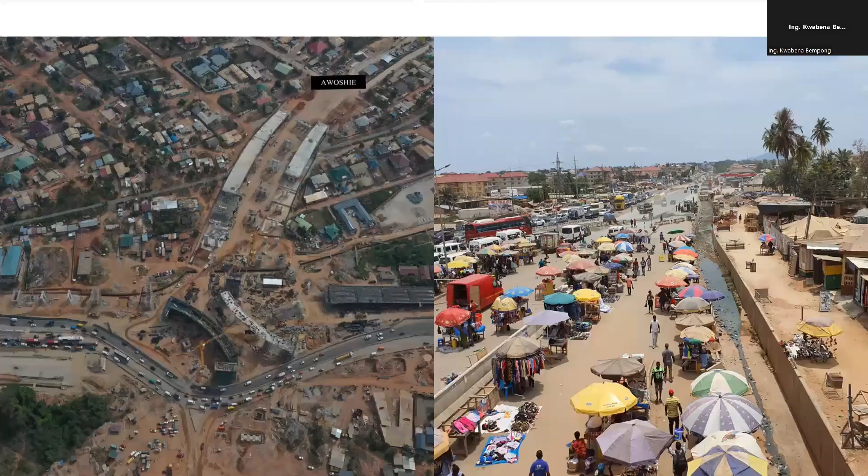Pokuase Interchange is now completed. And of course, there were challenges like any project. I'm not going to dwell on the challenges now, but we know about COVID, pedestrian traffic management, pilfering where people were stealing crash barriers, compensation issues, accidents, and if you go there today you'll see a lot of that. I think we need to have a discussion around some of these things much later.

So the president cuts the ribbon, as we'll say, for the completion of the project.

In conclusion, value engineering is a method that your project team employs to improve the value of your project by examining the functions of each item or element and its associated cost. I did say that value is equal to function over cost. It is important to know that improving the value of your project does not mean cutting costs; it also means optimizing the elements of the project through an analysis of all factors, including cost.

There is no standard for undertaking a value engineering process. Discuss with your team. Value engineering starts with planning, through design, to construction. It's never too early or too late to start. Follow through with the six steps in arriving at recommendations.

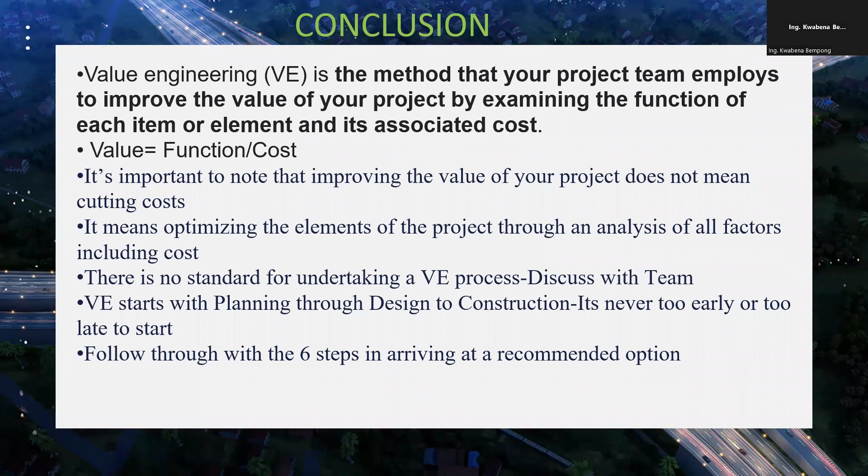In summary, value engineering is a valuable tool in the construction industry that can help identify cost-saving opportunities while maintaining or improving the quality and functionality of a project.